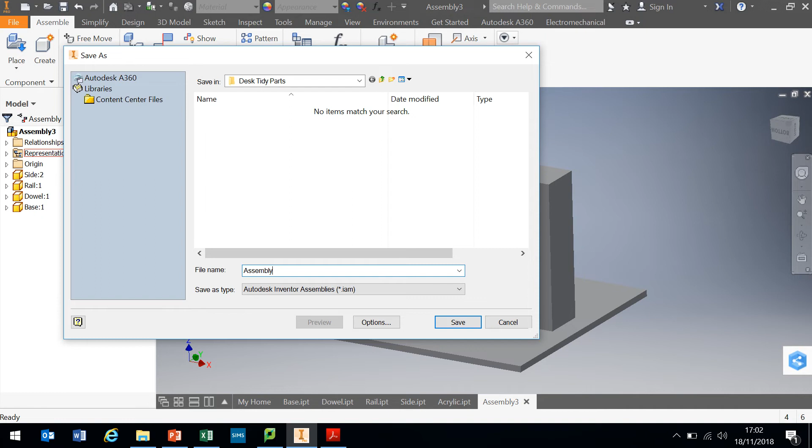Now what I didn't do at the end of the last one is just save it. So I think the best thing to do is File and Save As, and it's now an assembly drawing, so I was going to call it Assembly, and Save.

You'll notice that the next thing we need to do is bring in a new side. So I'm going to place a new side in, side and open. And it's going to rotate it in the X direction, so it's exactly how we want it.

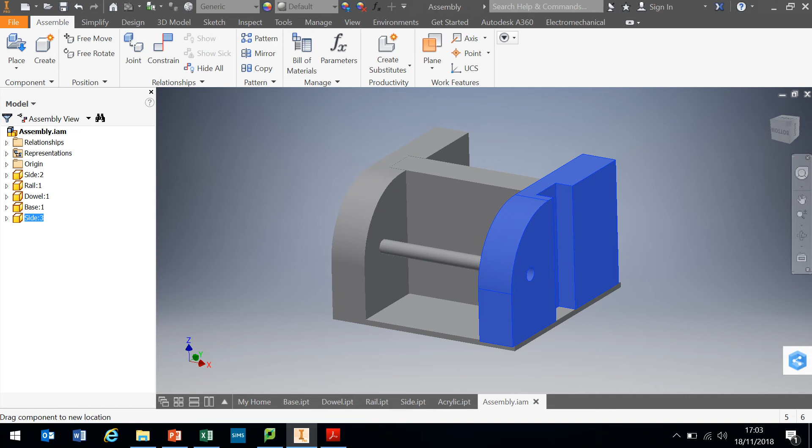Now hopefully some of you will have noticed that this isn't quite right. We need like an opposite, if that makes sense. No matter how hard I try, it's not going to fit perfectly in there, so it's the wrong way around. Now I could redraw the part the other way around, which would be time consuming, or we could use the mirror tool, which is a very cunning way of moving it.

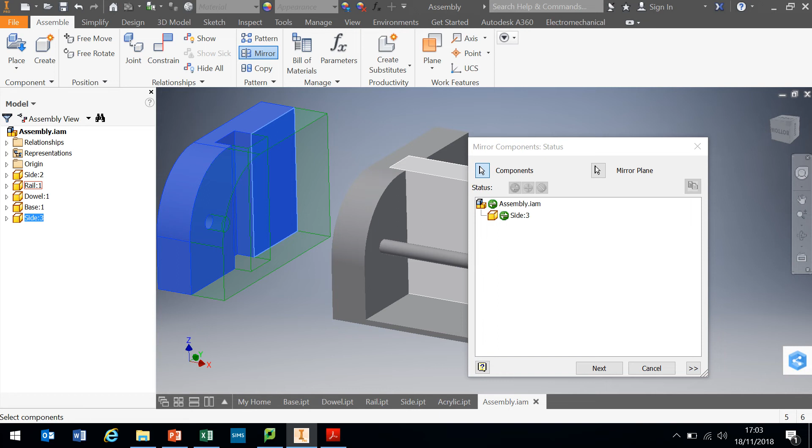So I'm going to click mirror, and what it wants me to do is select the component I want to mirror. So I'll select that component there. The next thing we need to do is tell it how we want to mirror it, the mirror plane. So I'm going to click the mirror plane and select that face there, and you'll notice it's ghosted in what will be the new component, so I can go next.

And it wants me to actually create a new component which is called Side_MIR. So I'm going to create that, and that will save it in our folder, which is really good, as a new part. So I'm going to delete the old part.

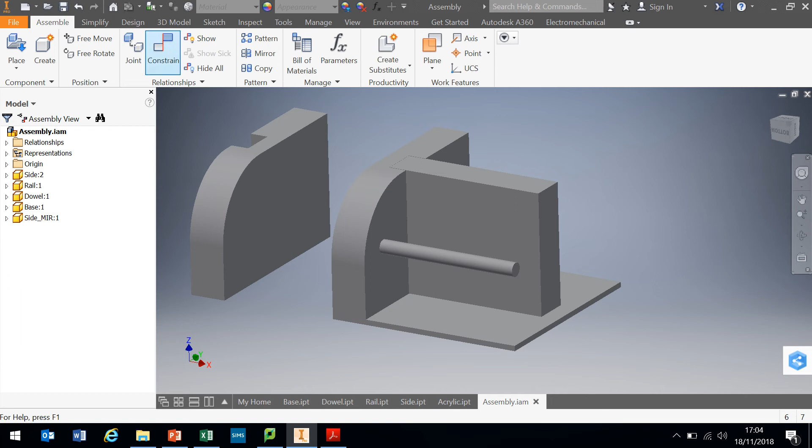And we just need to join it all together. So I was thinking of the easiest way to do it, so I might use a series of mates and flushes. I'm simply going to flush that face with that edge there, use the donk to apply, then flush that face with that face and apply.

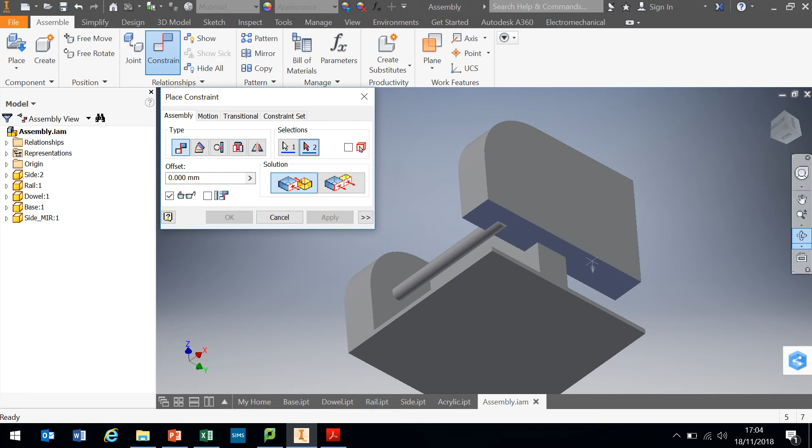If we just go down to there, I just need to stick that bottom edge to the base. So I'm going to go to mate, and I'm going to stick that one. I'm going to orbit around to that one there. Nice little donk, click apply, and that has brought that in. So I'm quite happy with that.

That's good. The next thing we need to do is place in the acrylic. So I'm going to select the acrylic and go open and bring it in.

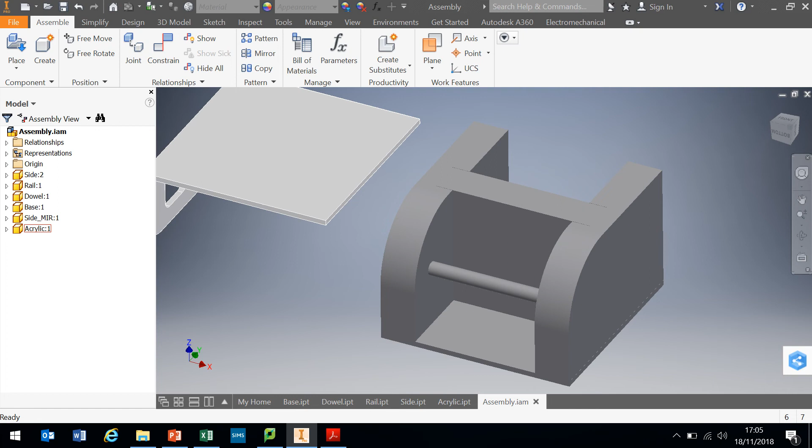Now I could try and reorientate it, but I'm just going to use my mate tool to turn everything around. So let's orbit around and do some mating. I'm going to click constrain, do a mate, so I'm going to mate that face to that face, and it's stuck that around, so I'm going to click apply.

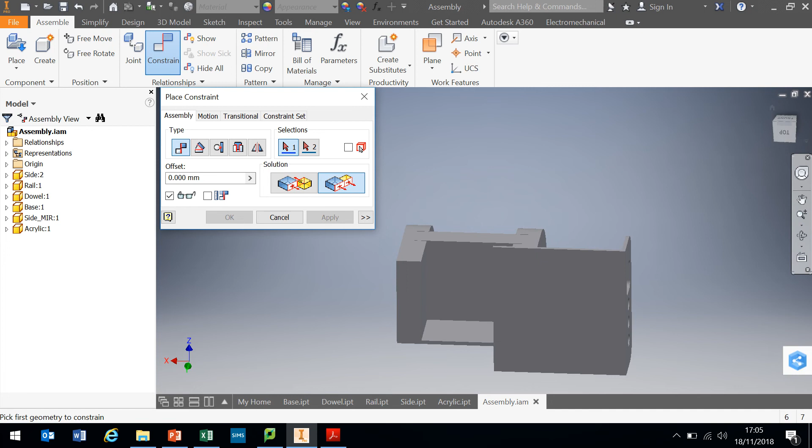And to completely turn it around the right way, I might just do two flushes. So I'm going to flush that thin edge there. It's got that there. Oh, that's not done. Just bear with me a second. Constrain.

Okay, so I was going to check what's been done. As a matter of fact, none of those have been saved, because you might have noticed that I didn't click apply. So get the constrain, I'm going to start again.

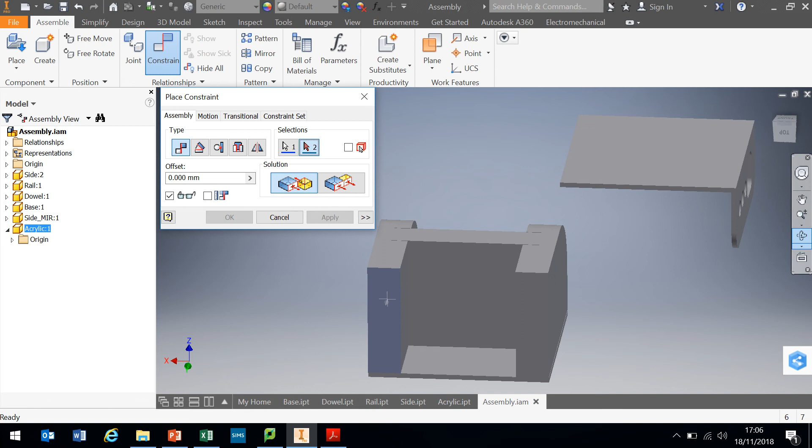Click mate, I'm going to select that face there, and orbit around, and I just want to go for that inside edge there and click apply. It's so important that you click apply after every move. So that's actually stuck to that edge there. Just bear with me, it's not looking right at the moment, but it will be very, very soon.

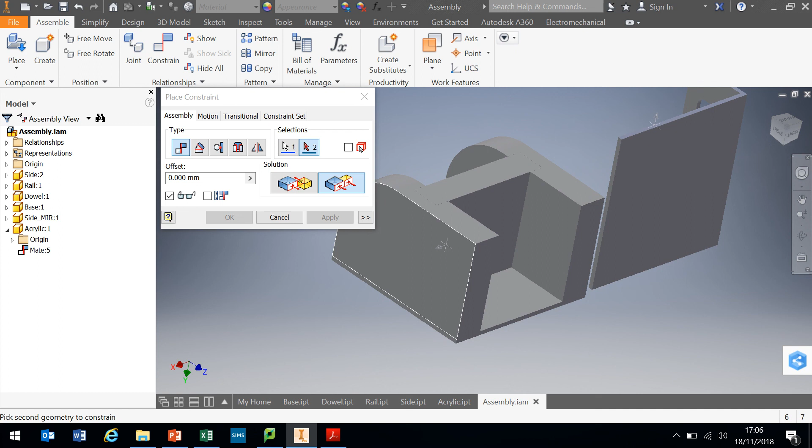So the next thing I need to do is flush that side edge there. If I orbit around to that edge there, it's spun it around for me, so I'm going to click apply again, must click apply.

And all that leaves us to do is one more move, and that is completed. So I'm going to flush that edge with that edge and click apply. And if I zoom out and orbit, we now have our completed desk tidy, which is rather nice.

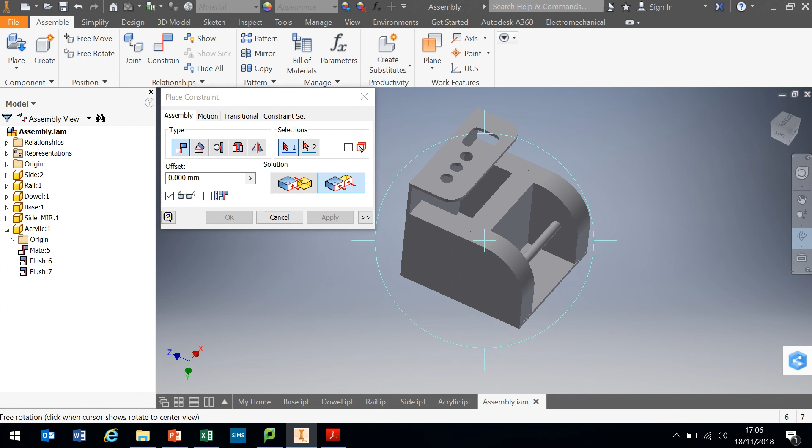So I'm going to move away from there and just save that. What it wants me to do is save changes to the dependent files, which is going to be the new mirror file. So I'm going to click yes to all and OK, and it'll create that new file for me, and there we have it.